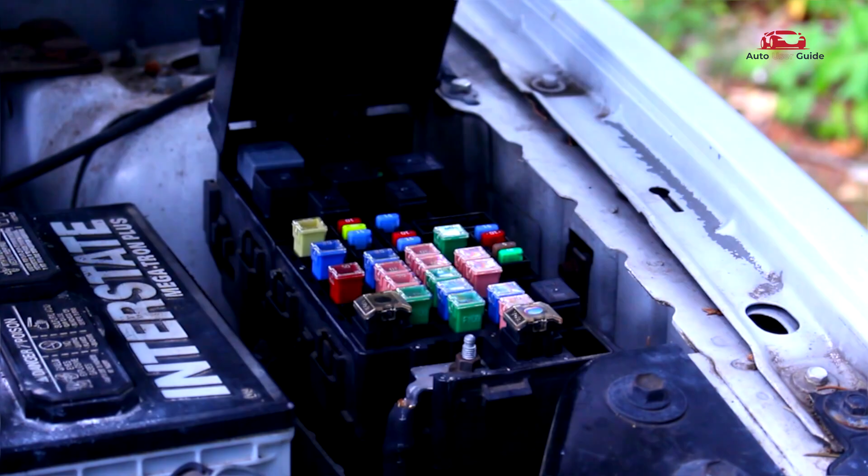Are you having trouble locating the fuse box on your 2023 Mercedes E Class? Wondering which fuse controls what in your car? In this video, we'll break down everything you need to know about the fuse box, its location, fuse diagram, and how to troubleshoot common issues. Stay tuned and let's get started.

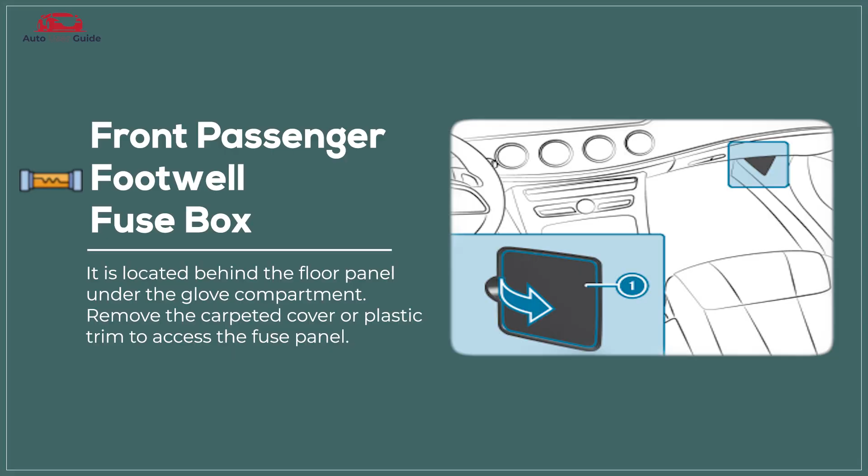Front passenger footwell fuse box. The front passenger footwell fuse box in the 2023 Mercedes E Class protects and distributes electrical power to the passenger cabin circuits, such as footwell lighting and seat heating. It prevents electrical faults by isolating overloaded or shorted circuits.

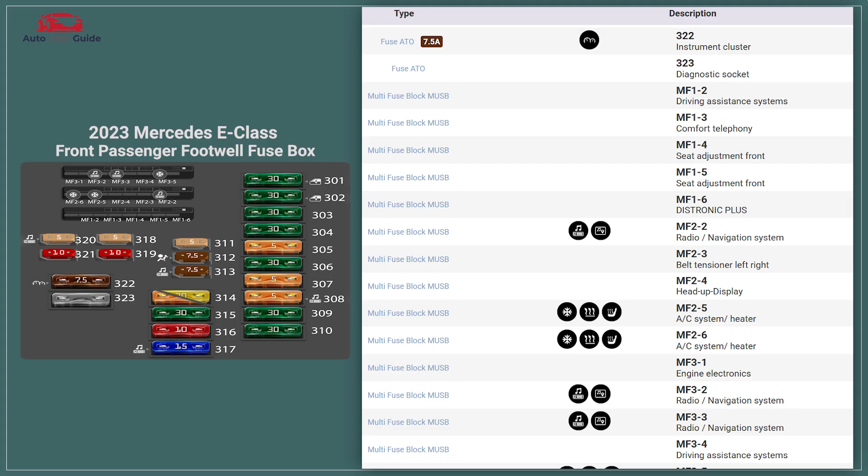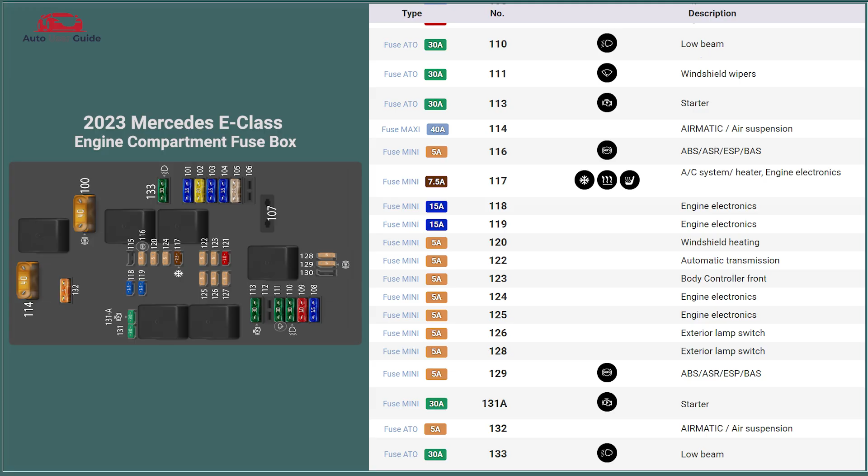Luggage compartment fuse box. The luggage compartment fuse box 1 in the 2023 Mercedes Benz E Class oversees and safeguards electrical circuits for rear functionalities, such as trunk lighting, hands-free power trunk lid, cargo area USB outlets, and relevant sensor or control modules.

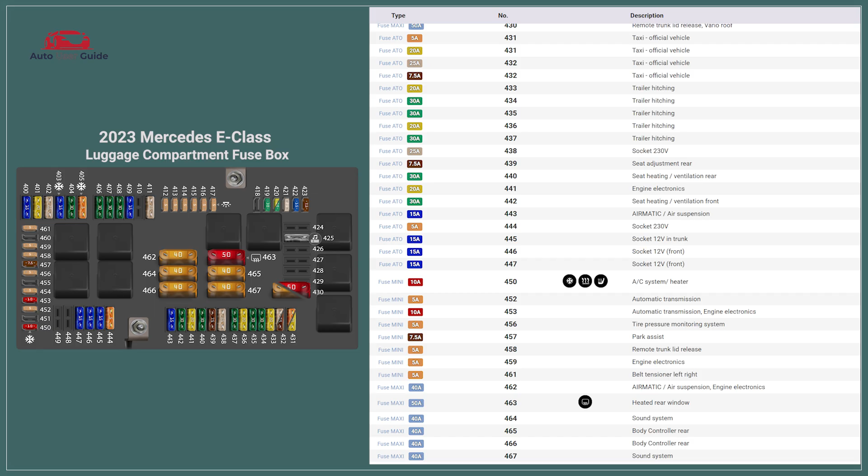The luggage compartment fuse box 2 in the 2023 Mercedes Benz E Class handles and protects additional heavy-duty and auxiliary rear-end electrical loads such as trailer wiring, trunk sockets, air suspension (Airmatic), rear seat adjustments, rear entertainment systems, and ambient lighting.

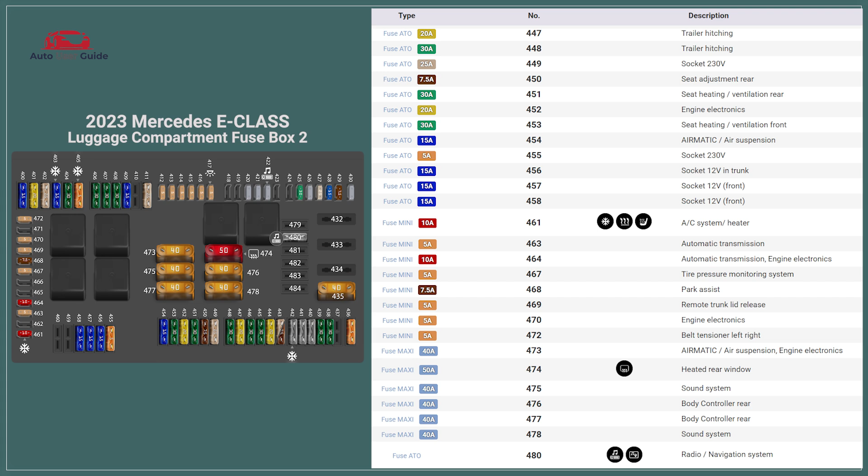Glass tube fuse, AGC fuse, SFE fuse.

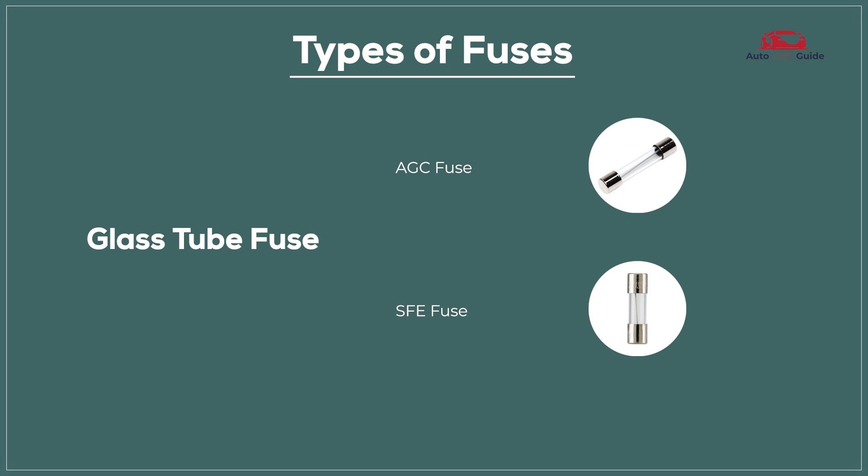PAL fuse, low profile PAL fuse, standard PAL fuse.

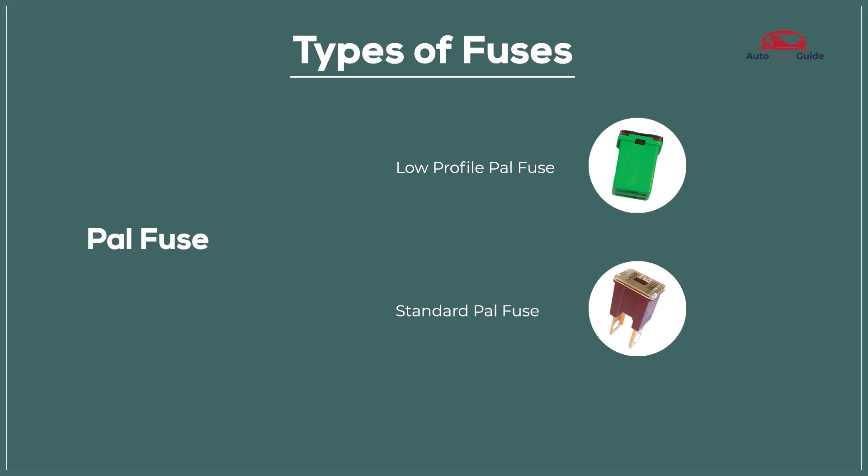Link fuse, mega fuse, high amperage link fuse.

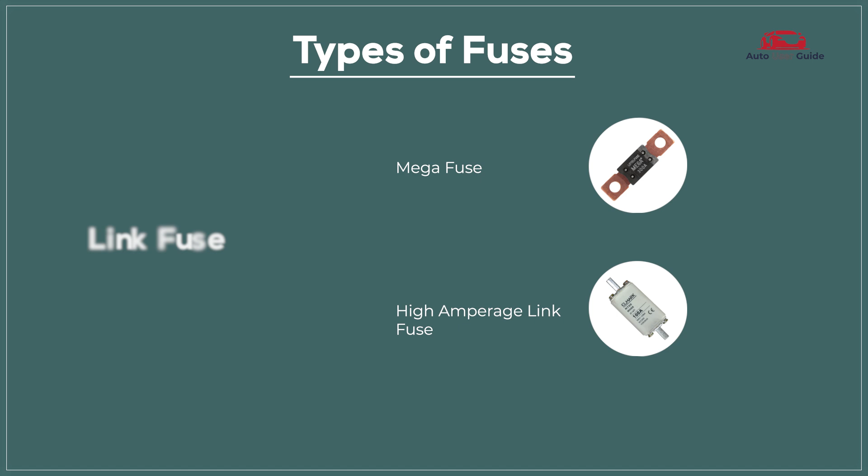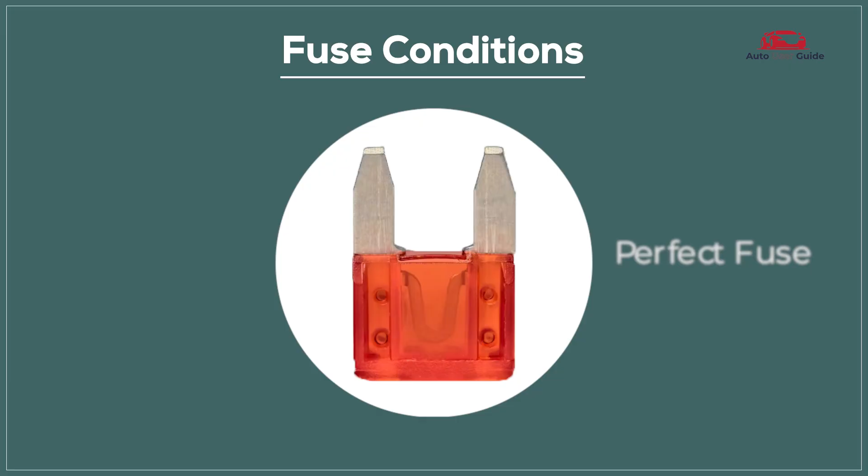Fuse conditions: blown fuse. A blown fuse means it's no longer functioning and needs replacement, while a perfect fuse is in good working condition and performing as expected.

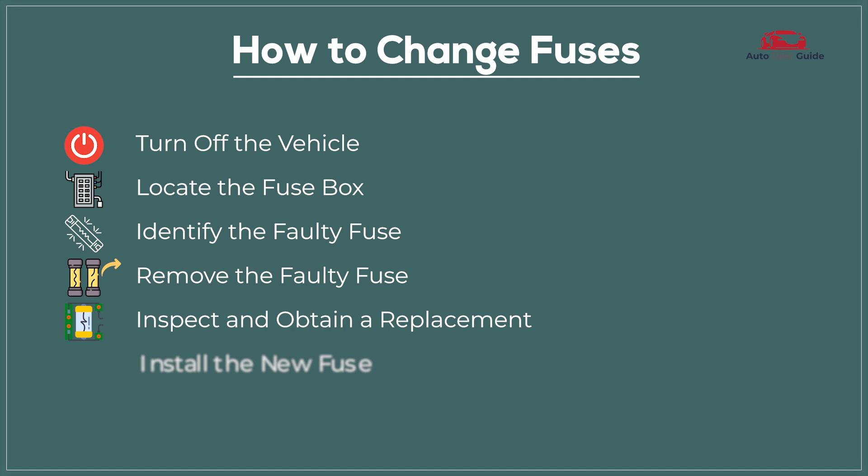How to change fuses: turn off the vehicle, locate the fuse box, identify the faulty fuse, remove the faulty fuse, inspect and obtain a replacement, install the new fuse, test the replacement.